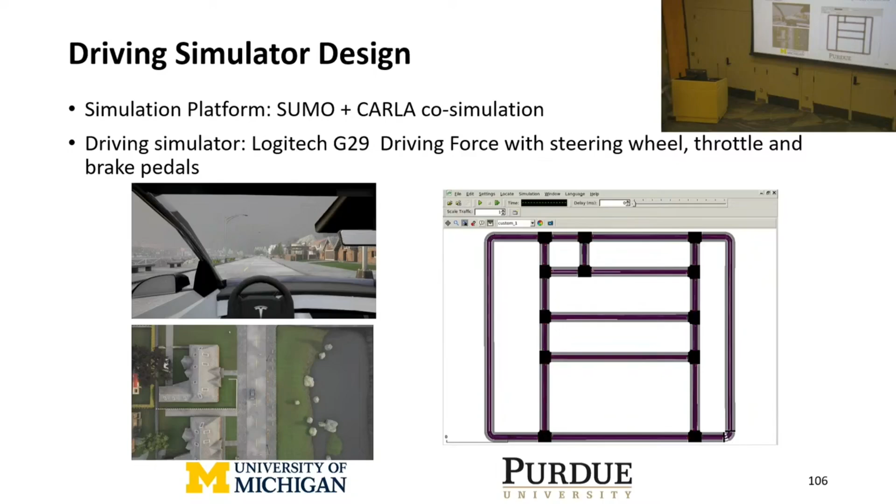Okay, so based on this, we designed two kinds of scenarios to mimic the remote operation. The first one is when the vehicle is approaching a static object. We assume it's out of its ODD, and then the remote operator will take control of the vehicle to bypass this obstacle.

The second case is a little bit more complicated. While the remote operator is controlling the vehicle, there's also an oncoming vehicle from the other direction that may cause a collision with the AV. Okay, so the safety check module that we developed tries to monitor the status of the AV and then stop the command from the remote operator if it finds potential collisions.

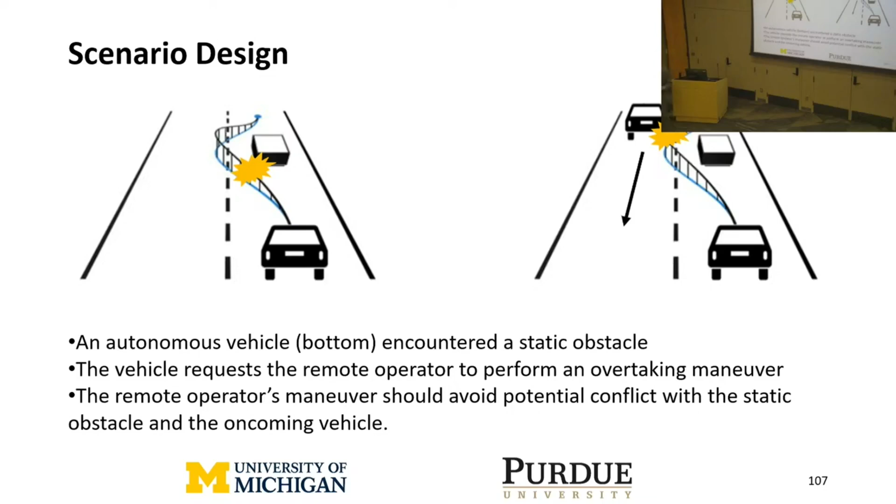So for both cases, first we developed a very simple static check model. When the remote operator is taking control of the vehicle, this model will be activated and keep monitoring the status of the vehicle, and based on its current trajectory, predict its future trajectory. If the near future trajectory has a conflict with a static obstacle, then the vehicle will reject the command and try to stop.

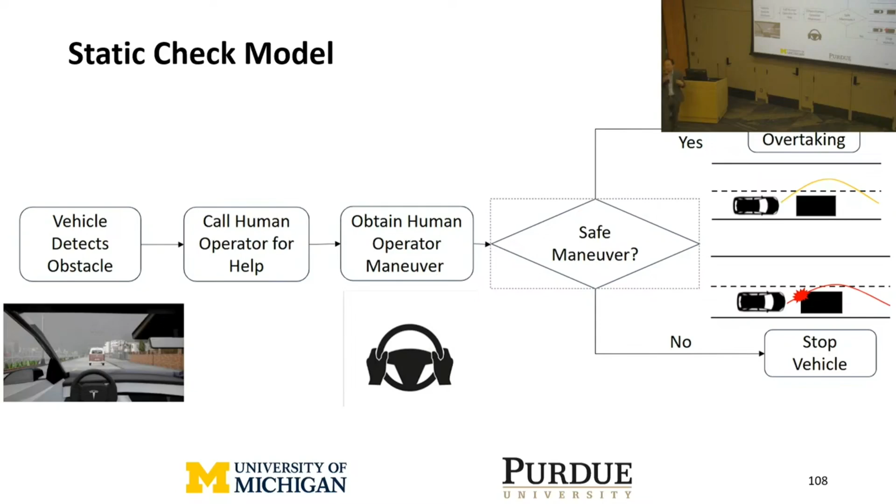So this is the test. The vehicle was first under the autopilot. This is CARLA's autonomous driving algorithm. And you can see now the remote operator, me, tried to take over, and I did not do a good job and collided into the front vehicle, right? So this is without the safety check.

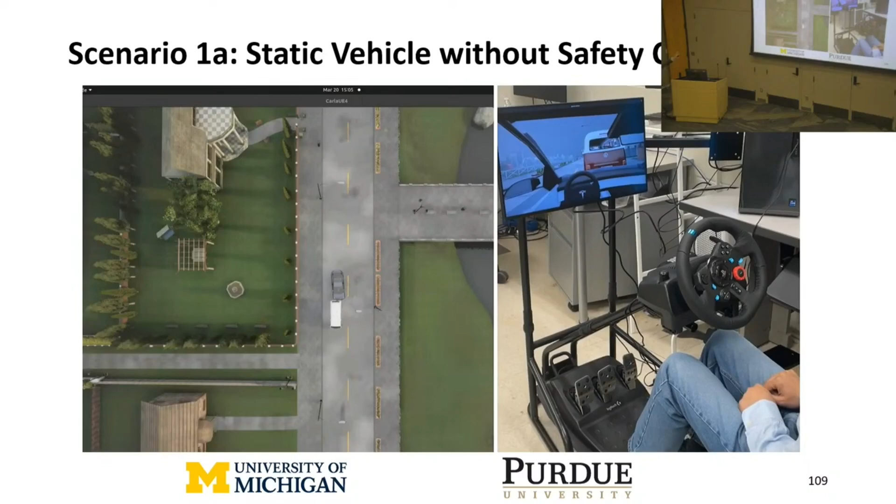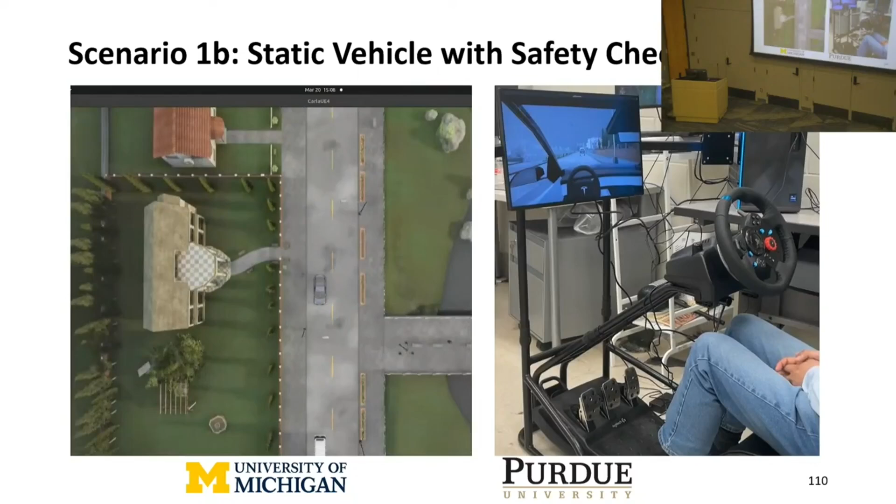When we implemented the safety check, in the same case, autopilot first, and then when I start to take control, you can see the vehicle was under my control at first, but after a few seconds, when it detects my maneuver has a potential collision with the leading vehicle, it stops the vehicle automatically.

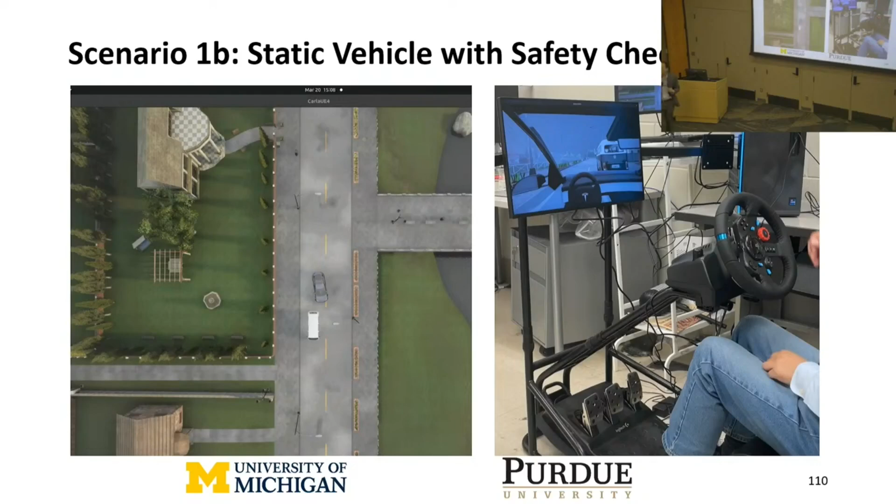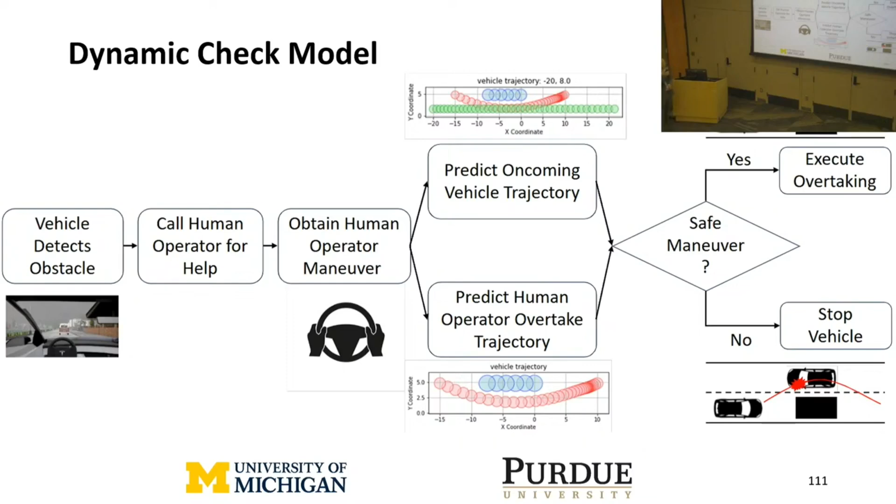So the second case, when we have an oncoming vehicle, is a little bit more complicated. In this case, we developed two trajectory prediction models. We formulate them as an optimization problem, basically to predict the future trajectory of both the ego vehicle, the AV, and the oncoming vehicle. And if the two predicted trajectories conflict, then the safety check module will be activated to stop the vehicle. Right, and this is the case.

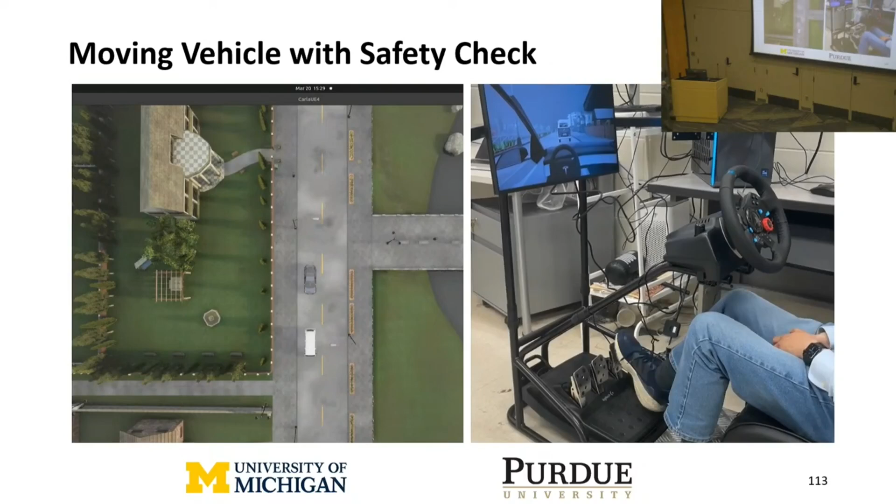And of course, this is the case with the safety check. Okay, this plays on the other side. So you can see that when I tried to control first, the vehicle did not really move. You can see the vehicle stopped there and did not move because it detected the conflict with the oncoming vehicle on the other side.

You can see after this vehicle has passed, now the vehicle started to take my command again. And this time, apparently I did a pretty good job navigating the vehicle back to the original lane, and then it came back to the control of the autopilot.

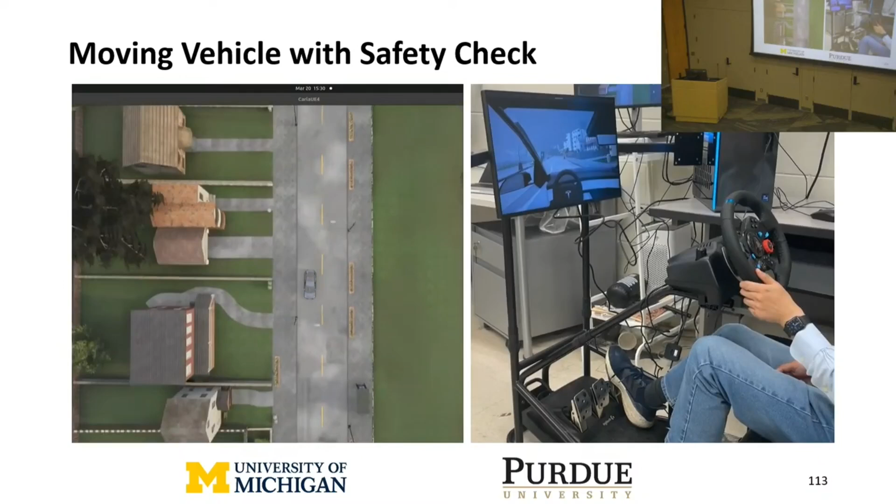Okay, so if you look at this case, the assumption under the scenario is that this AV can always detect the oncoming traffic from the other side. This is actually not very realistic, especially if this AV is stuck behind some obstacle, right? So this is why we think collaborative sensing can also play an important role in the remote operation of AVs. If other vehicles or infrastructure can detect the oncoming vehicle and send that to the AV, it can further improve the safety check module of the vehicle.

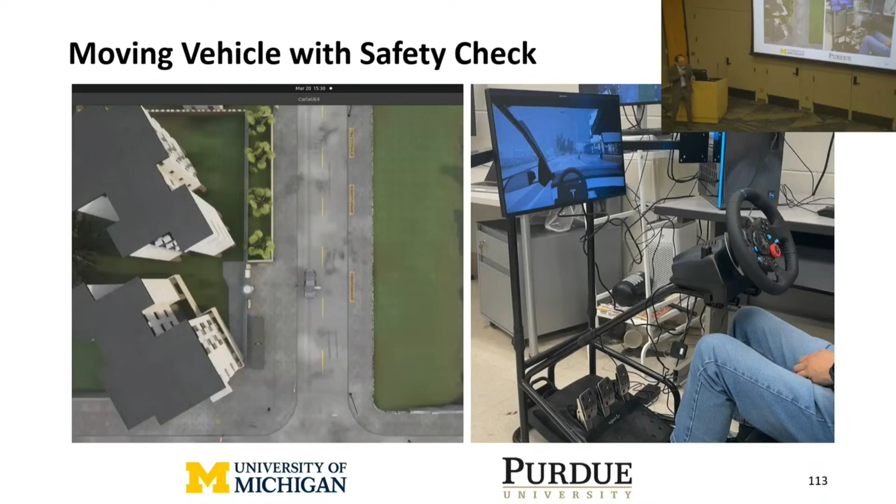So to that, Morley will talk about the remote sensing part, also the collaborative sensing part. Yeah, thanks. So as Yiheng mentioned, there's always limitations with just leveraging sensor data from a single vehicle's perspective. So to that end, we could leverage data from other vehicles in the form of collaborative sensing.

I also want to mention we are looking at the requirement in terms of communication. It turns out having support from other vehicles can also enhance the communication robustness. So when you do remote operator support, you really need to have a reliable communication channel between the vehicle and the remote operator. But we know that network connectivity is not always guaranteed to be high bandwidth, reliable, and low latency. So that's the challenge we have to address, right?

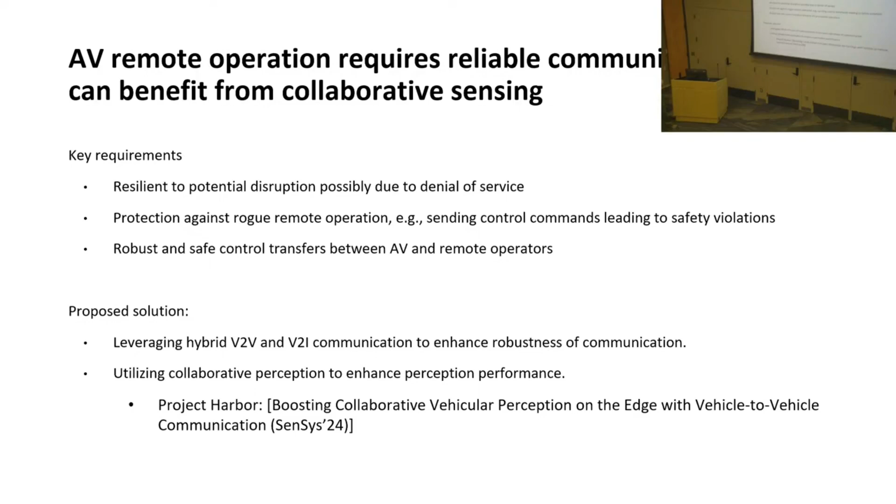So with cellular connectivity, I will show you some data later. It turns out the network connectivity, depending on the mobility coverage areas, highly varies depending on the cellular provider deployment. So we have a project called Harbor, which I will describe in a bit more detail here. And I believe this is very applicable to support remote operation. So CVP stands for Collaborative Vehicular Perception.

So the idea here is that traditionally, we can just use a peer-to-peer design, called V2V, vehicle-to-vehicle data sharing. So from an ego vehicle's perspective, you have data locally collected from your vehicle alone, but you could potentially benefit from data from other vehicles. How do you share such data, right? Sensing data could be very expensive in terms of bandwidth requirement.

So if you just leverage peer-to-peer based data sharing, you can do some local compression to reduce the data size. Then you can send the data to other vehicles, and the vehicle does local processing by merging the data together to improve the visibility. For example, an occluded object might more likely be detected if you get data from other vehicles. So that's kind of intuitive. So as a result of this, we can have better coverage, right? Some existing work has already demonstrated that by leveraging just another vehicle, you can already improve the coverage and detecting occluded objects.

So another thought is that for communication, you can have peer-to-peer communication or V2V, vehicle-to-vehicle, but naturally we have a base station, right? Cellular base station, we have the infrastructure side. So one thought is that we can also leverage the central server to do processing because the vehicle itself has limited computational resources. So here the thought is that we can aggregate the sensing data after compression.

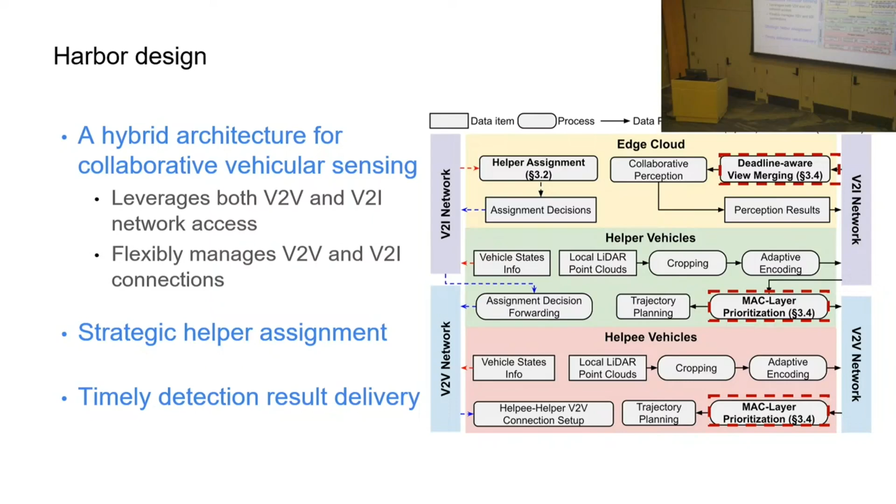Given lack of time, I want to just highlight some of the key innovations we have for this work. So one key idea here is that we need to identify these performance impacting factors in assigning who are the helpees and who are the helpers to help upload the data to the infrastructure. So one naive way is just to measure the bandwidth directly, but obviously this is expensive and not always scalable.

So our intuition is that we can look at factors which are easier to measure, like distance and interference, because with wireless communication, you have to be careful. If everyone's talking at the same time, right, you have these interference issues. So interference is something that you can passively measure. So basically what we did is that we used these factors, based on physical distance and the network interference levels, to figure out how to assign helpers to the helpees.

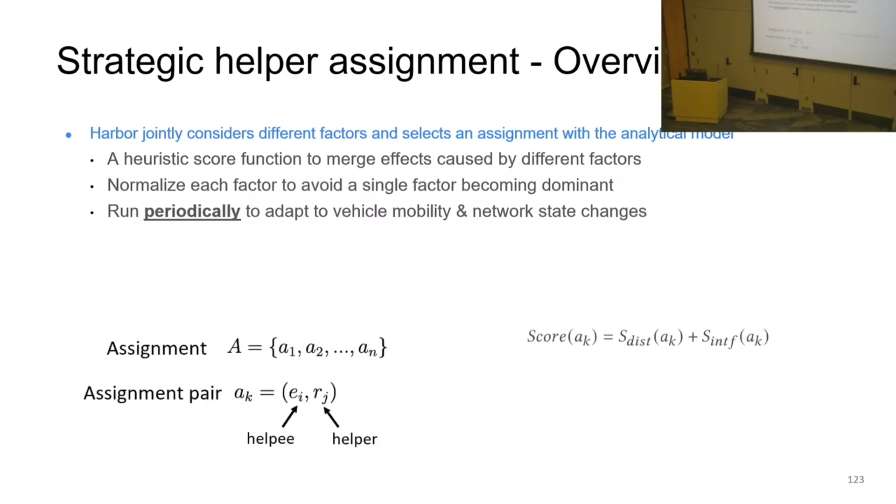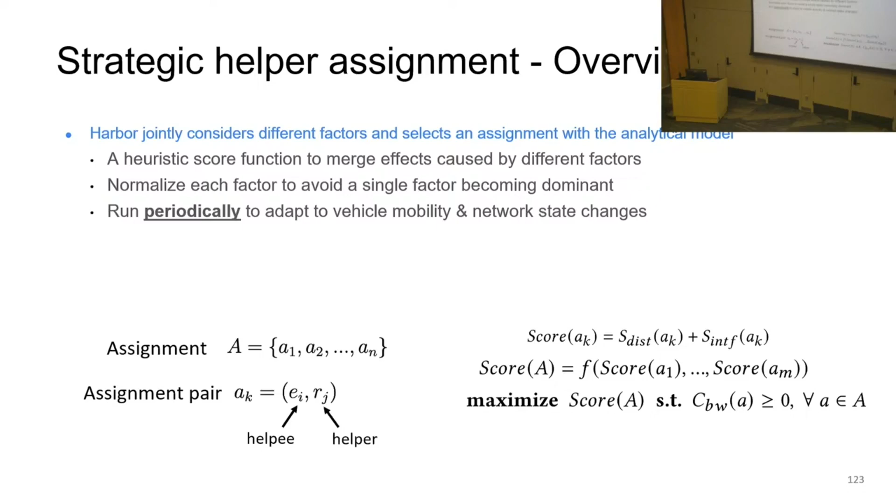And this heuristic can be run periodically because the network state constantly changes, the vehicles move, so therefore it needs to be continuously updated. So we have an algorithm which runs continuously to assign the vehicles who are supposed to upload data on behalf of vehicles who do not have sufficient network connectivity. And this runs by maximizing the overall score, so you can balance out depending on the data upload needs.

The other aspect of this, we have to also be aware of the application deadlines, right? The real-time nature of the task is really critical. So we use NTP to help synchronize, because the synchronization aspect is also critical for making sure that the clock is synchronized.

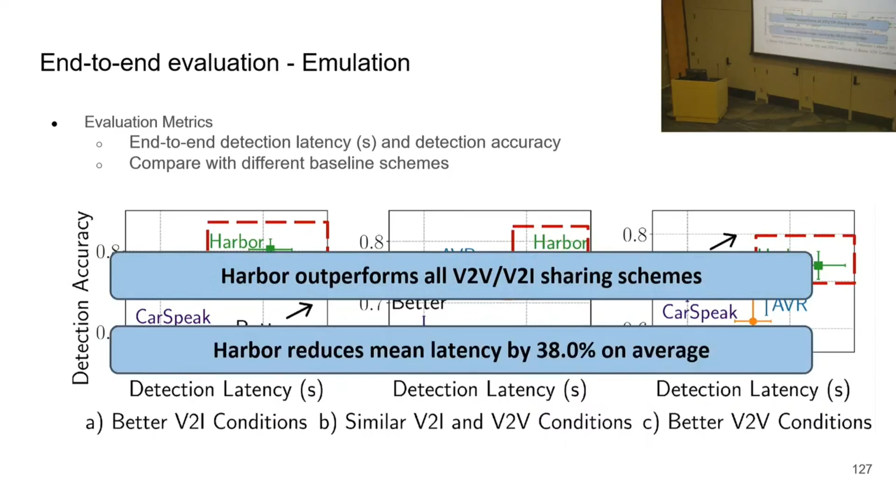Okay, so I'm just gonna skip ahead to show the evaluation results. And I think what's most interesting is the Mcity-based evaluation results. But at a high level, we have a reduction of the mean latency to upload the results by 38%. And just the last part is the case study we did using the Mcity testbed. So in this setup, we are able to detect more occluded objects by leveraging this bridge from CAV-B, which uses CAV-A to be able to send the necessary data to detect an occluded object.

Applied to the remote operation context, you can imagine the remote operator wants to be able to see that occluded object in order to make safer driving decisions on behalf of the AV. So with that, I just want to leave you a set of future work items.